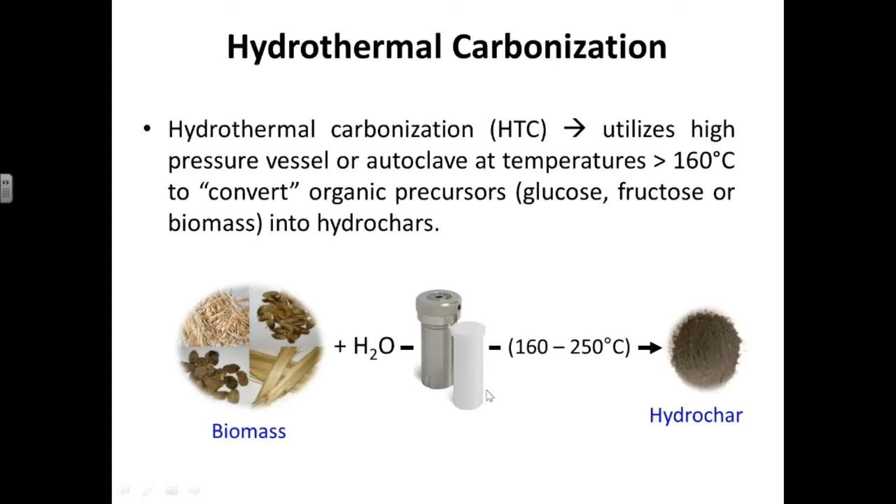Normally the temperature is between 160 to 250. This can also go above 250, but with the autoclave we are using now, the maximum temperature we can use is up to 250. Well, hydrochar may contain some carbon microspheres. These carbon microspheres have many advantages in adsorption of pollutants in industry. So they are similar to activated carbon, but activated carbons have higher surface area. It can go up to 2,000 square meters per gram or more. Hydrochar normally is not more than 60, or can go up to maybe 100, but seldom. Normally it is below that, below 50.

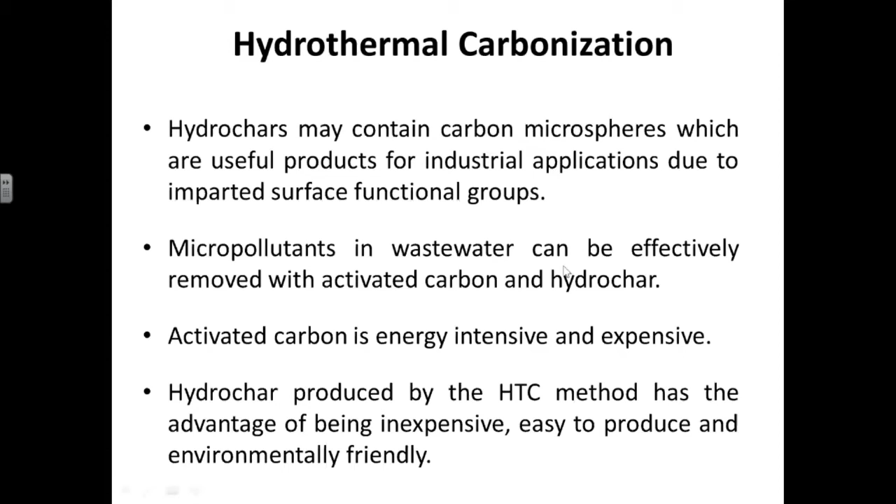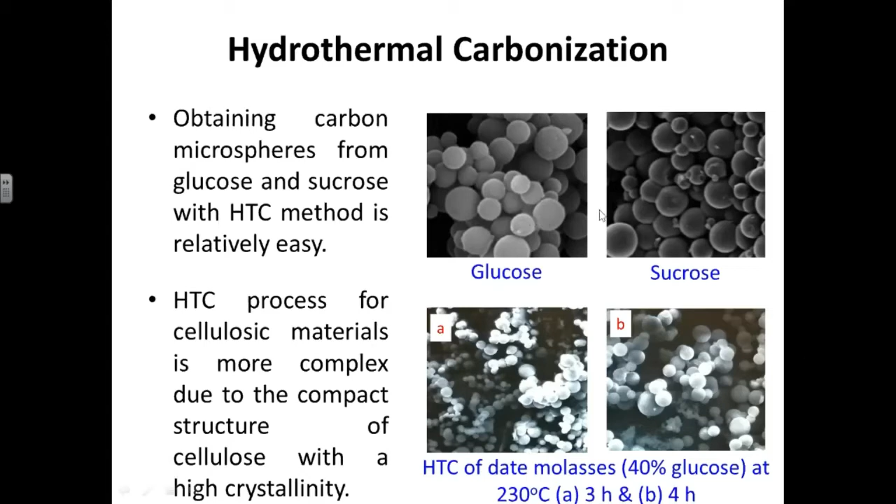The bottom two images we have obtained currently from date molasses, which contain 40% glucose. Image A is at 230 and 3 hours residence time. Image B is at 230 and 4 hours. So we can see from image B, the longer the residence time, the bigger the carbon microspheres develop. The spheres will be visible and complete. Anyway, producing carbon microspheres from raw material is not as easy as from glucose and sucrose.

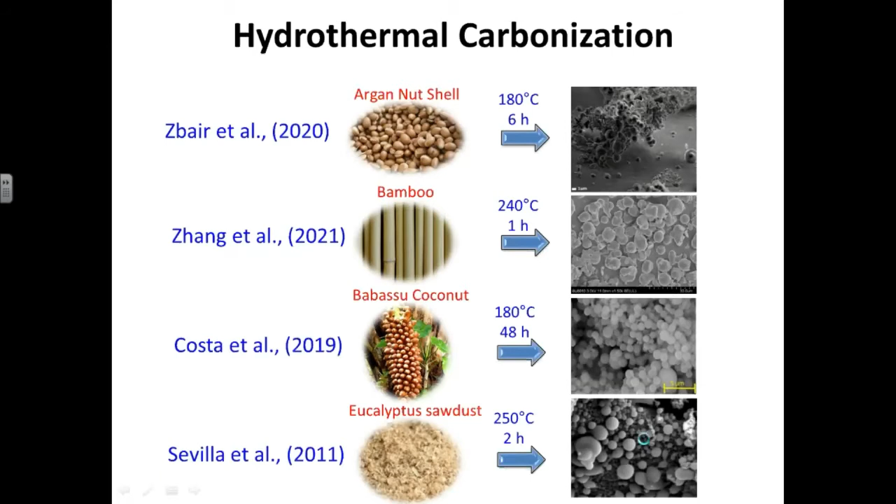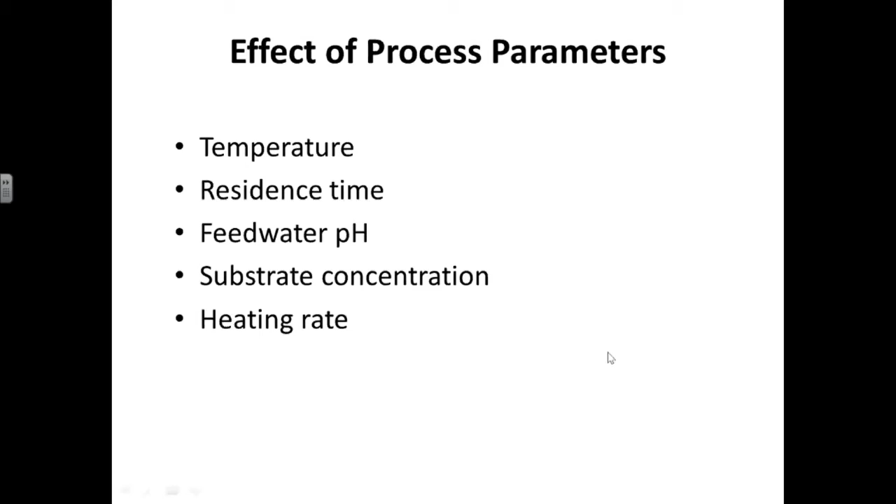We have different parameters which affect the production of hydrochar, such as temperature, residence time, feedwater pH, substrate concentration, and heating rate. I will go quickly through these parameters. Temperature is very important, maybe the most important parameter. Normally, the higher the temperature, the more hydrochar or carbon microspheres we can obtain, but not always, because if we go above maybe 250 for some biomasses, the carbon microspheres demolish. We don't see any more carbon microspheres. It becomes hydrochar without forming carbon microspheres.

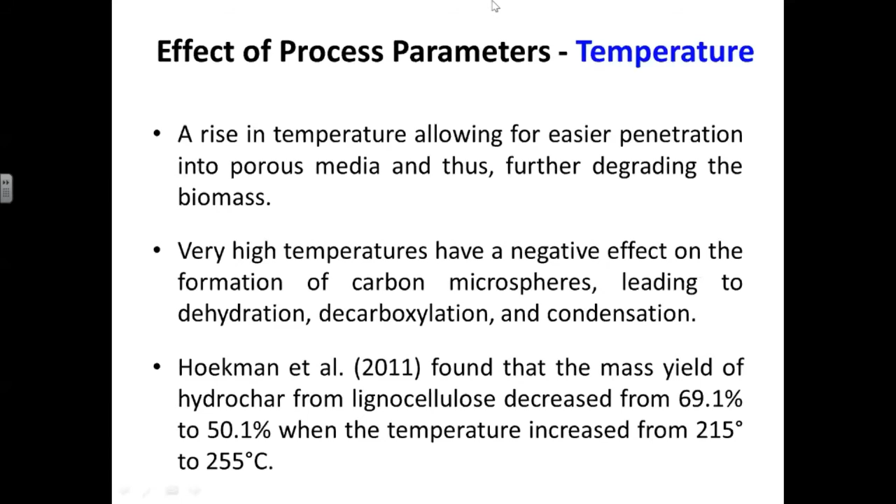The second parameter is residence time. Residence time is also important, but different studies concluded that the residence time should be more than 2 hours. We sometimes cannot obtain hydrochar or carbon microsphere at short residence time, like 30 seconds or 1 hour. It depends on the material, the biomass. Some materials can obtain it easily, but for some it is usually difficult to obtain at short residence time.

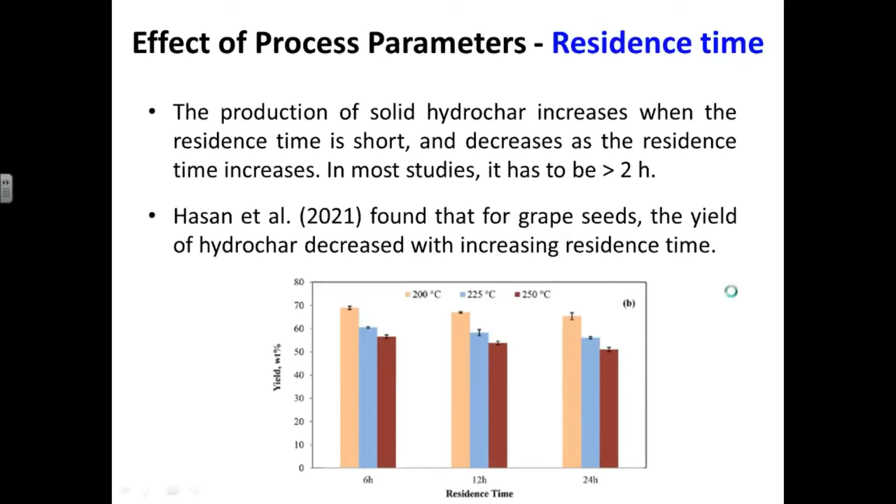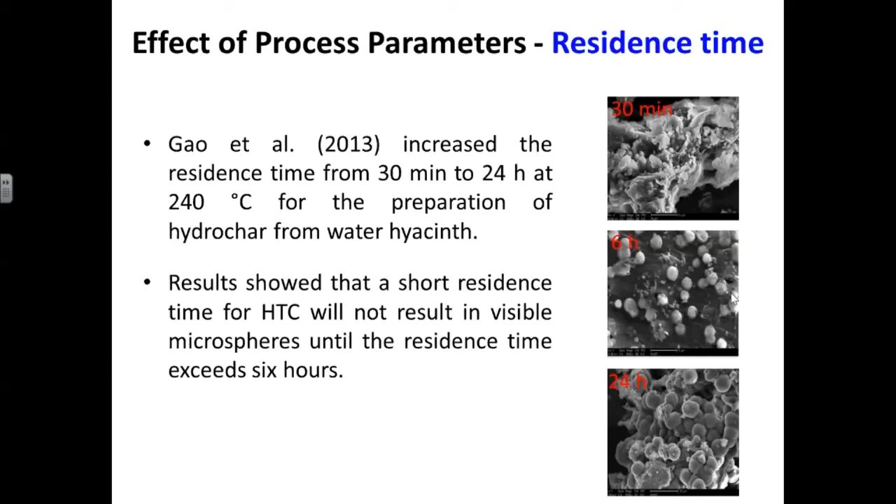Feedwater pH is also another parameter affecting the formation of carbon microsphere. Liang et al. found lowering pH will enhance the carbon microsphere formation from starch in the early stage of the reaction. Yang also investigated the hydrothermal carbonization of husk and nuts at pH range of 4 to 13. The results show that at pH 13, the yield of product significantly reduced, while at the pH range from 4 to 10, there is not much change.

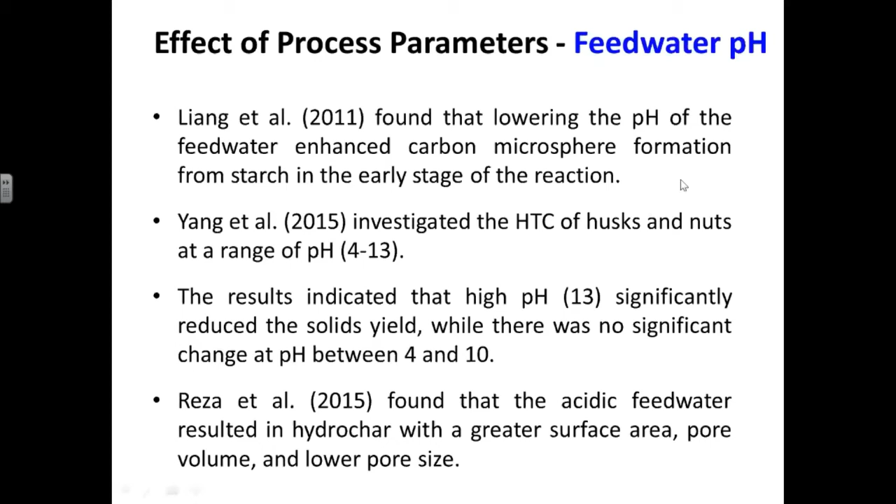Reza also found that acidic feedwater results in hydrochar with a greater surface area, volume, and lower pore size. Zhang found that for cotton fibers, addition of CuSO4 supports the formation of carbon microsphere at lower temperature. As we see here, at 210, the formation of microsphere is not visible, but increasing the temperature, the carbon microsphere developed, especially at 330. Before adding the CuSO4, there was no carbon microsphere even at 330.

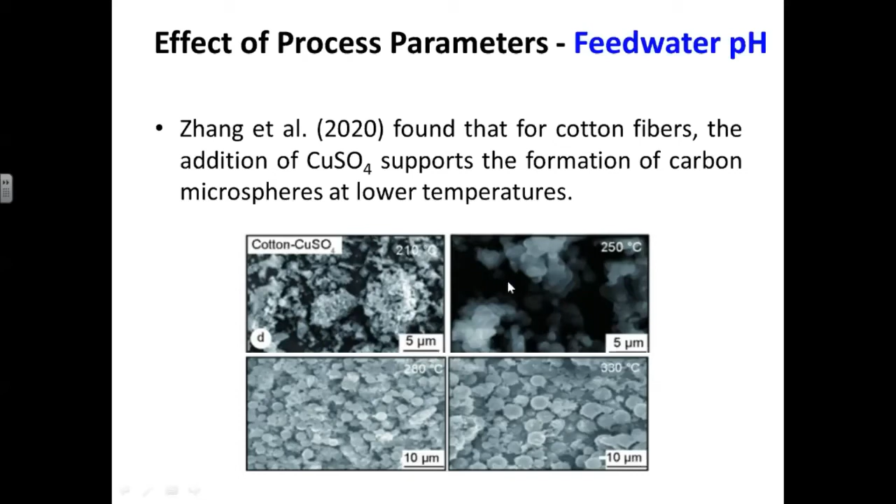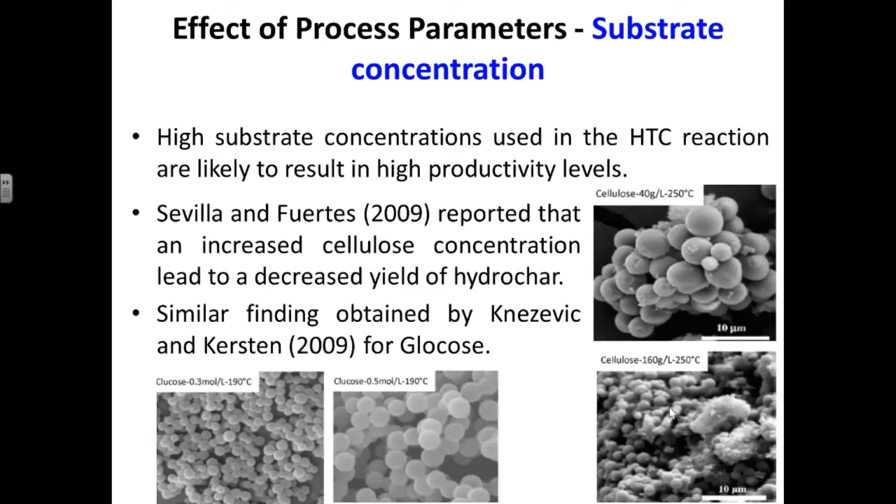The other parameter is substrate concentration. Usually high substrate concentration will result in high productivity level, but this is not always true. Some studies like Sevilla reported that increasing the cellulose concentration will decrease the yield of hydrochar. Similar results were reported by Knezevic for glucose. And the heating rate is also another parameter affecting the production of hydrochar or formation of carbon microsphere.

Zhang investigated the effect of heating rate between 5 and 140 degrees C per minute for grassland, and results indicated that the yield reduced from 22 to 23% to 8 to 9% when the heating rate increased. Similar results were obtained by Zhang for corn stover and wood chip. They found that the yield of hydrochar decreased from 19 to 9% when the heating rate increased from 5 to 140 degrees centigrade per minute.

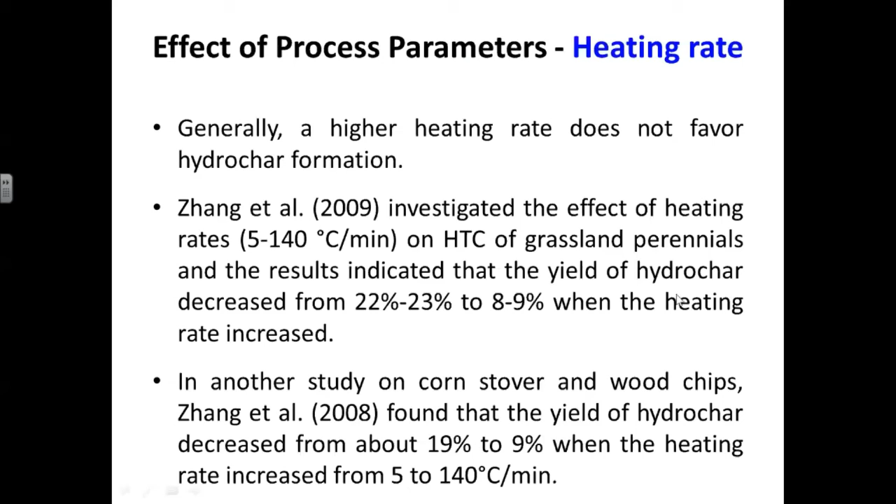Now I'll present some results regarding the project which we are working on currently, sponsored by the National Plan of Science, Technology and Innovation, King Abdulaziz City for Science and Technology. This project is about synthesizing carbon microsphere and hydrochar from palm biomass waste and its application in wastewater treatment. We have different palm biomass here, but the majority is waste from date palm and some from sabal palm. These are the two palms available in the country.

Most of the waste comes from date palm, and the country currently has about 31 million date palm trees, and each tree produces about 20 to 35 kilograms of waste, depending on the age of the palm. There are many types of date palms, about 400 types, and they're not all the same: different production, different fruits and different biomass. The total waste is about 800 metric tons per year.

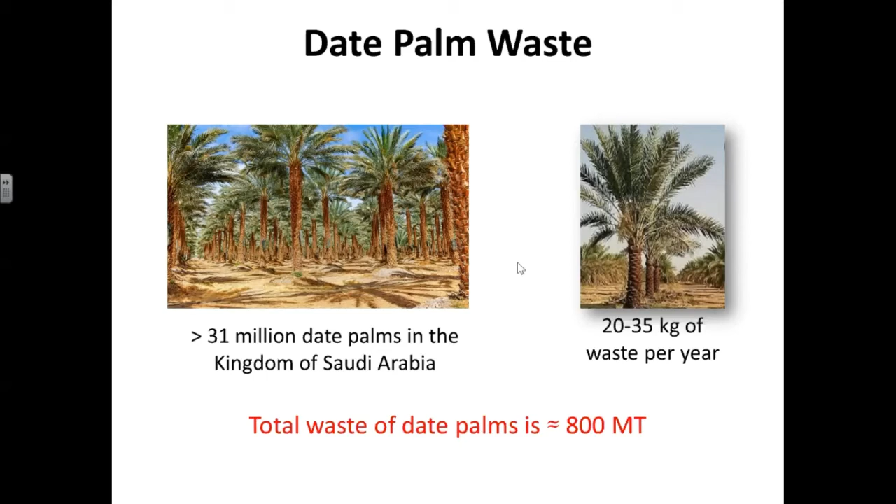In the Kingdom of Saudi Arabia, there is no clear commercial production from date palm waste. We have only seen charcoal in the market in past years, and it was quite expensive. I guess now no more; I haven't seen it for a few years. There is another application, still not really well developed, which is oil for cosmetics from seeds. Some people sell it, but in small quantities.

So the normal way of disposing of this waste is the traditional way of burning, and this causes so much pollution. Other than that, they only use it for some traditional products, like making boxes or bags, and this consumes very little of the waste.

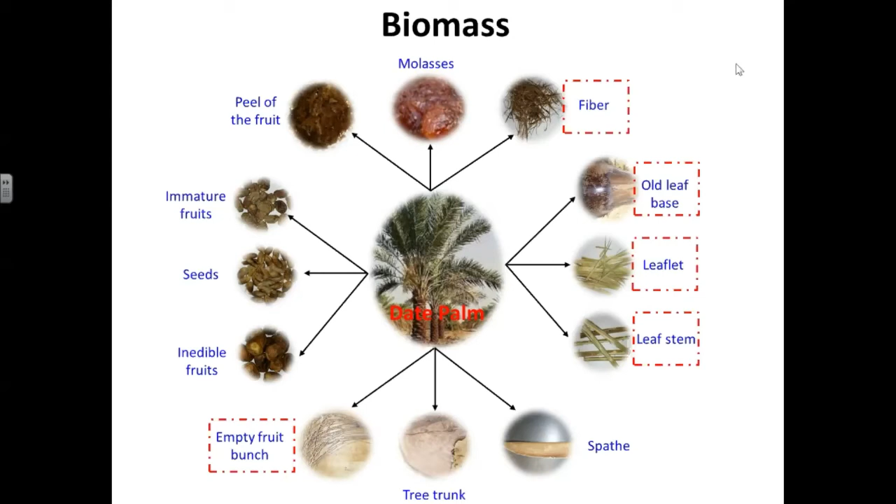We have many biomass types from date palm, but we are focusing on the majority, which is leaflet, leaf stem, and the base. These contribute the majority of the waste. Fibers also, and empty fruit bunch. The others also, but not as much as these five types of waste, because I think per year they clean or remove these five types about maybe 3 times from the tree.

So the other type of biomass is from sabal palm. We also have sabal palm here, used in gardens and on the street sides, but with sabal palms the number of trees is much less than the date palm, and the waste will not contribute as much as the one from palm trees. We have 3 types of waste: the leaf base, leaf stem, and fibers.

I will present some results about sabal palm because we have 2 teams. One team is working on sabal and the other one is working on the date palm, and we recently received more results on sabal palm. So I will present some results here about this type of palm.

We used the jaw crusher to crush the biomass. First we wash the biomass and clean the dust and other materials, and then dry it at 80 degrees for about 2 days. Then we crush it using this jaw crusher, and then we soften the material because the material is still not very soft. Then we use the laboratory plate mill, and then we use sieves to get the desired size.

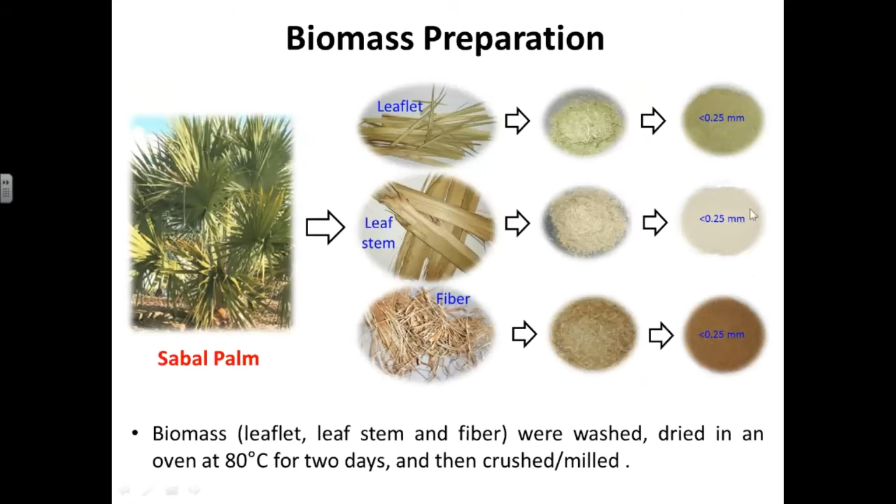We have tried different sizes, but we found that 0.25 millimeter is giving us acceptable results. And if we soften the material more, we didn't obtain a better BET area. So we worked with this size. And as you see here, this is what we get from the jaw crusher, and this is from the laboratory blade mill.

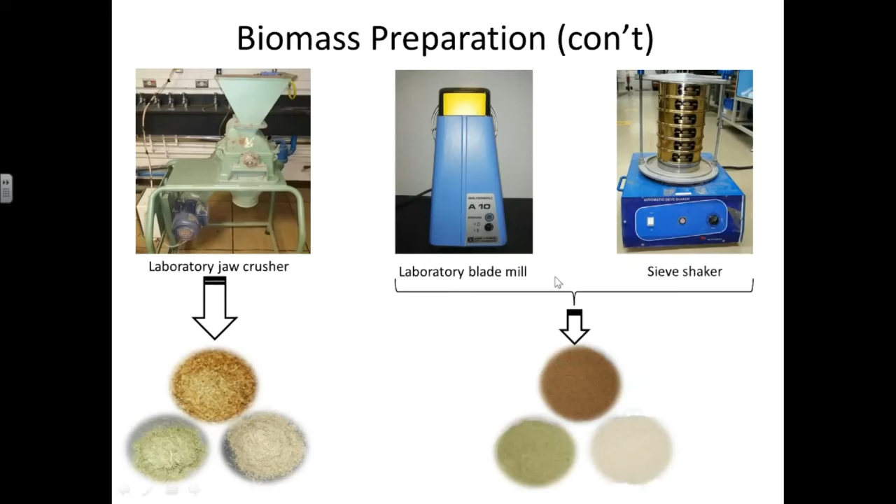Then we start producing the hydrochar by first mixing the biomass. We took 2.5 grams of biomass mixed with deionized water for about 5 hours. Then we place it in the Teflon tubes here in the autoclave, and we seal it very well. Keep it inside the oven at 230 for different times; we selected 4 to 8 hours. Some materials gave good microspheres at 4 hours, but some did not. So we use different residence times.

With the product we get, we separate the solid particles using a centrifuge. And then we dry it in the oven for about 1 day at about 80 degrees, then we obtain the product. In our case, we found that carbon microspheres appeared in the 3 samples we have. But for date palm, we found that some biomass doesn't contain carbon microspheres, and that's why we are trying to change some parameters to obtain the carbon microspheres.

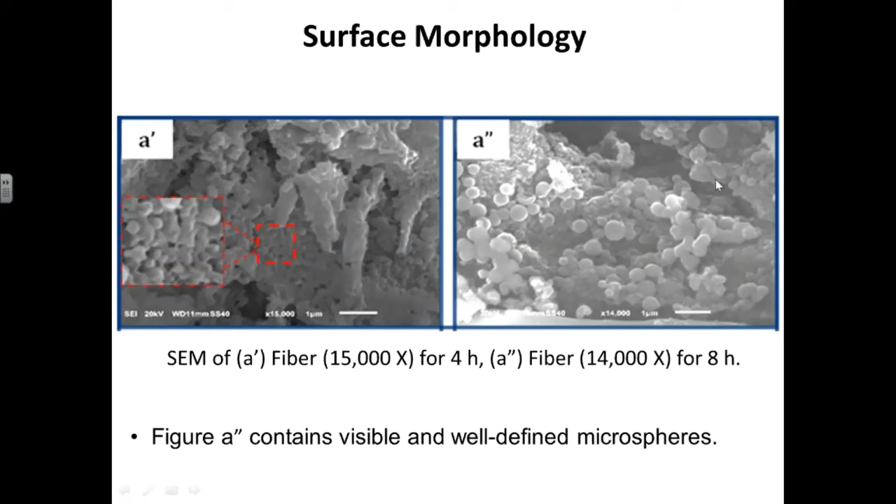And this picture shows the images of the carbon microsphere particles, the spheres there. As you see from figure A', there are some carbon microspheres, but not well developed. You see maybe this part still needs more time to develop, and when we increase the time from 4 to 8 hours, we obtain better, full spheres. And this is for the first sample, fibers, and this one for the B sample, leaf stem.

And here we can see, this is 4 hours, and this is 8 hours. The spheres may be demolished because of the longer residence time. So 4 hours is enough for this sample, but for the previous one, 4 hours wasn't enough. And for leaflet, we found that 4 hours is also good enough to develop full spheres.

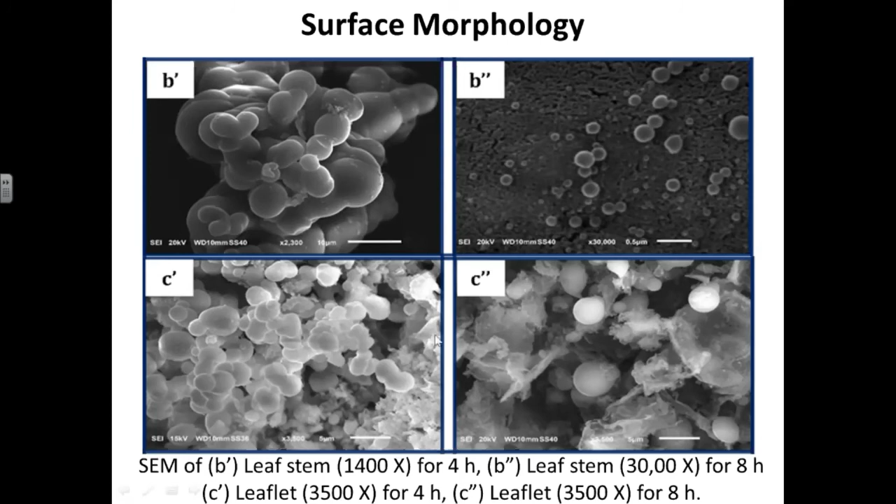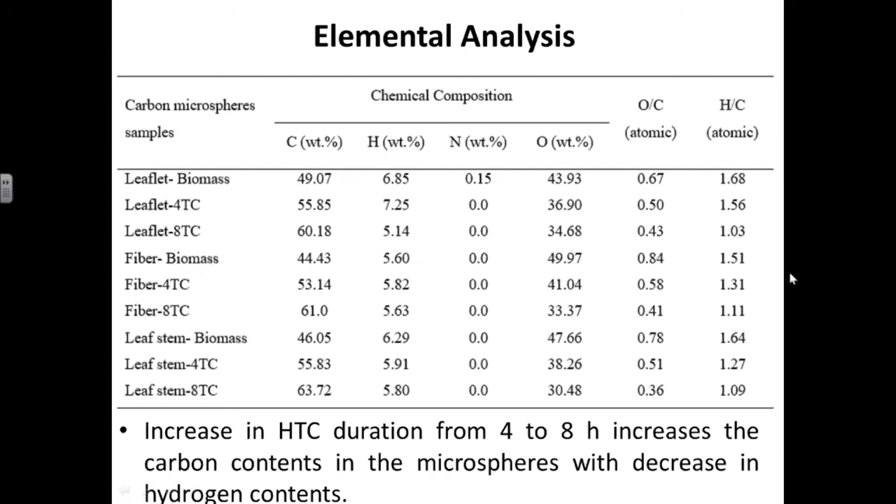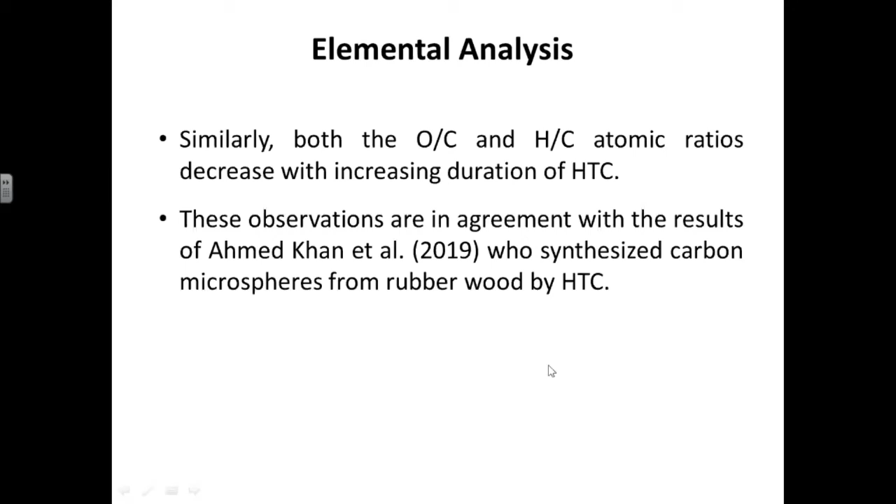Well, the elemental analysis results show that the carbon content in the leaf stem at 8 hours is the highest here, and the oxygen to carbon and hydrogen to carbon ratios decrease with the increase of the duration, as you see in these 2 columns. And the same observation was reported by Ahmed Khan, who synthesized carbon microspheres from rubber wood.

And this table shows the BET area. The highest we obtained, for fiber at 8 hours, is almost 60, but the other samples are less than that. But according to the literature, if the surface area is below 60, this means the carbon microsphere is not a fully developed porous material. So we concluded that what we have developed will not give a good result as activated carbon because the surface area is quite low.

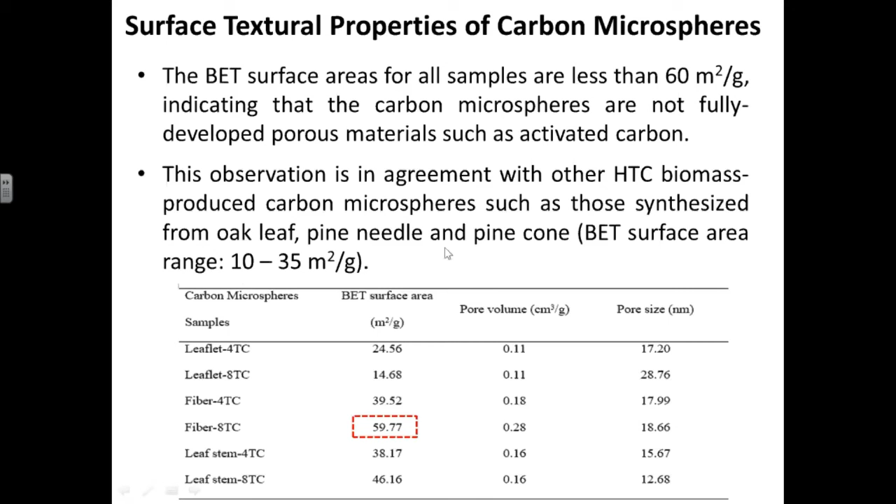The same observation was reported by other people for different biomass, about 10 to 35 square meters per gram, and we obtained maybe slightly higher. We used what we obtained for adsorption with methylene blue to test the efficiency of removing the pollutant from wastewater. The highest we obtained, for leaflet, is about 40 milligrams per gram, and this is quite low compared to activated carbon.

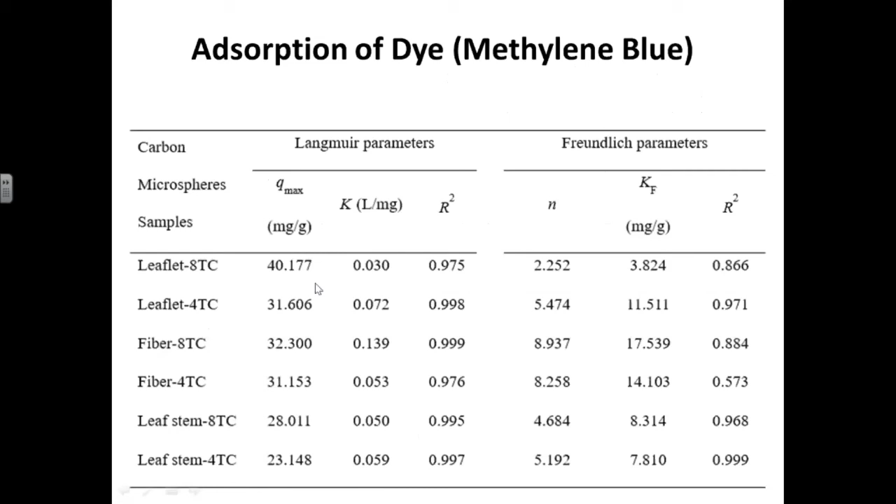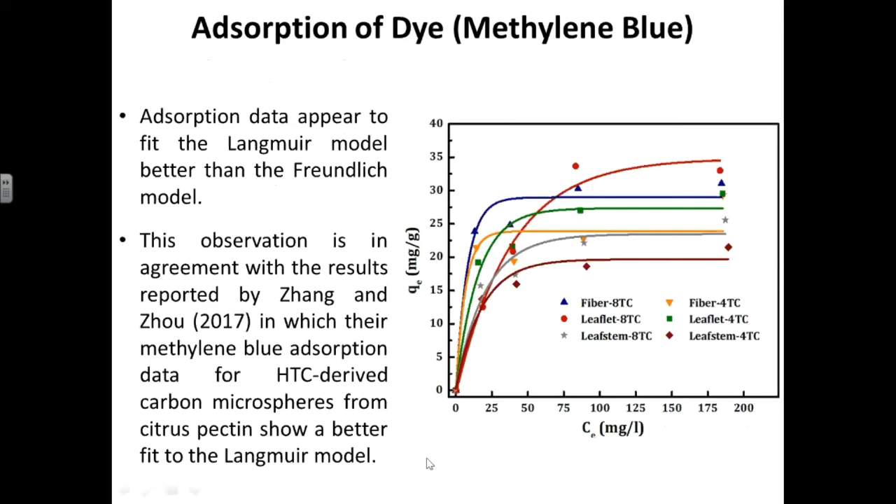However, the full results are illustrated in this figure, but this gives some indication that the material can be used as a raw material, because we haven't done any chemical or physical activation yet. So the adsorption data appear to fit the Langmuir model better than the Freundlich model. And this is reported also by Zhang, who also tested his hydrochar for methylene blue adsorption.

And this suggested that the mechanism we obtain is chemisorption, and the adsorption will appear only on the surface. So there is no porous material, or the molecules of the methylene blue are bigger than the pores inside the surface. So that's why we are trying to improve the surface area and the porosity of the material.

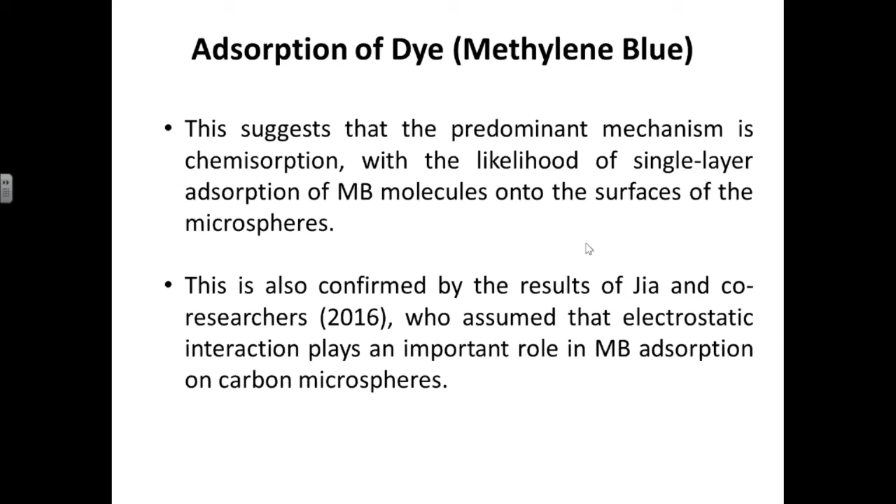Anyway, we also confirmed our result with the Jia and co-researchers. They also obtained hydrochar with low surface area, below 60, and they assumed the removal of methylene blue happened due to electrostatic interaction. Regarding functional groups in our project, we found that the acidic, oxygenated functional groups are about 0.4 to 0.5 millimole per gram, and this is not that much. So we need to increase this.

Before I go to future work, I conclude what we have obtained here. We successfully obtained carbon microspheres using biomass from date palm, and we tested them for removal of methylene blue. Although the result is still low, this is a good indication that the material could be used for removal of pollutants from wastewater.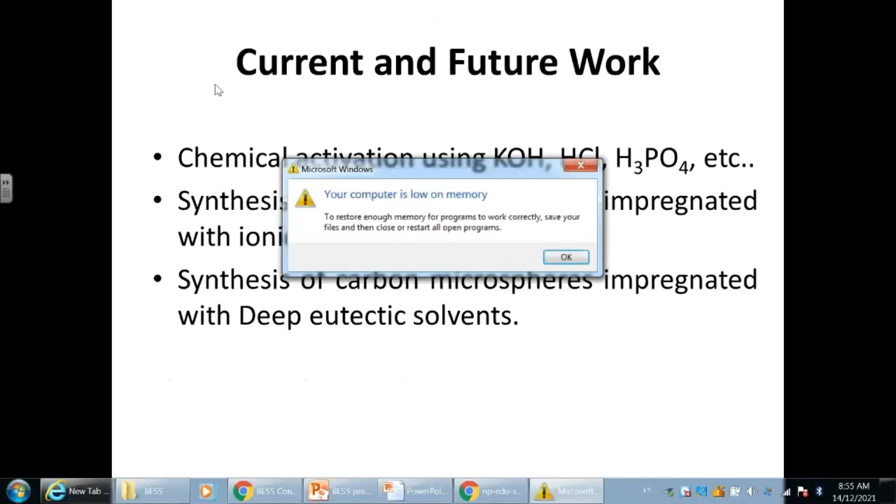So our main objective is to improve the surface area by chemical activation, for example using KOH or HCl, and we will also use ionic liquids to increase the surface area, and also DES. These two chemicals are novel; we synthesize them in our lab, and we expect a better result than KOH, HCl and other chemicals, because ionic liquids and DES are less toxic, and some of them are green. The toxicity level is very low, and we expect a better result from the environmental side.